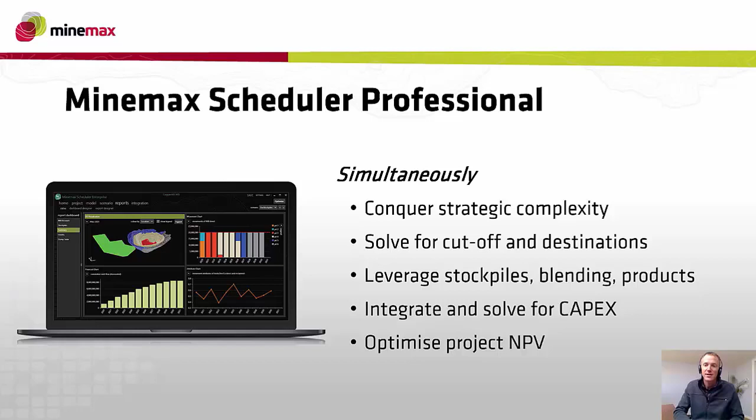In this presentation, I'm going to be referring to a range of techniques that employ our flagship product, that's Minemax Scheduler Professional. Scheduler is a premium software. It can be used to leverage multiple aspects of an operation simultaneously, and it delivers maximum NPV. And it does this in a way that provides the mine planner tremendous flexibility, and even more importantly, a strong set of controls. And that is because we believe in balancing the power of optimization, the power of that mathematical objective, with the expertise of that individual mine planner in their own context to steer that schedule in the right direction.

Mine planners are doing amazing things with Minemax Scheduler all around the globe. You've heard about some of this already today. You might hear about more of it later this afternoon. I've had the honor to work with a number of our clients personally, many of them here in the Americas. And while each situation is unique in terms of requirements, most mine planners that we talk to are considering core elements or core processes in their strategic mine planning, and they consider that as part of standard practice. So just to elaborate on that a bit further, we're talking about these types of things.

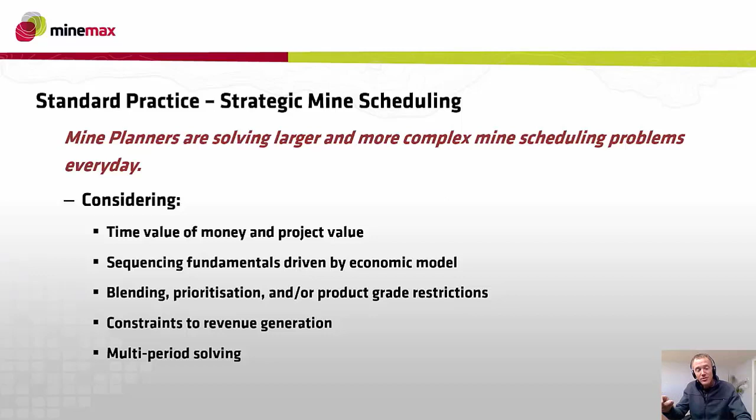Scheduling, considering the time value of money, the importance of a discount rate in the context of a schedule. The derivation or the determination of the mining sequence, considering an economic model: that's activity-based costing, maybe fixed costing, revenue models, these things. The management of blending, product spec, and destination at the same time the mining schedule is produced. Honoring multiple parallel constraints aligned to production capacities or other practical controls. And solving schedules considering future implication. What I mean by that is multi-period solving, considering everything that the decisions I make in this period may impact in the future.

So I'm going to build upon this foundation by talking about some complexities on which that foundation can be used as a platform. Some of those complexities are these: how to incorporate the option for backfilling exhausted pits with waste material in the schedule, how to consider constraints not only on the destinations for blocks, but also on the routes that we use for haulage to access them. How do we include the scheduling of waste for tailings dam modeling requirements, to build the dams with mine waste material? How to properly assess capital options in the framework of a mining schedule, and how to incorporate financial objectives into the scheduling process.

And I've pulled these 5 out because we're talking to a lot of people all the time, and these 5 seem to come up fairly often. They're widely applicable, and each of these particular situations presents a unique opportunity to influence the mining schedule. And so in integrated optimization, these are great problems.

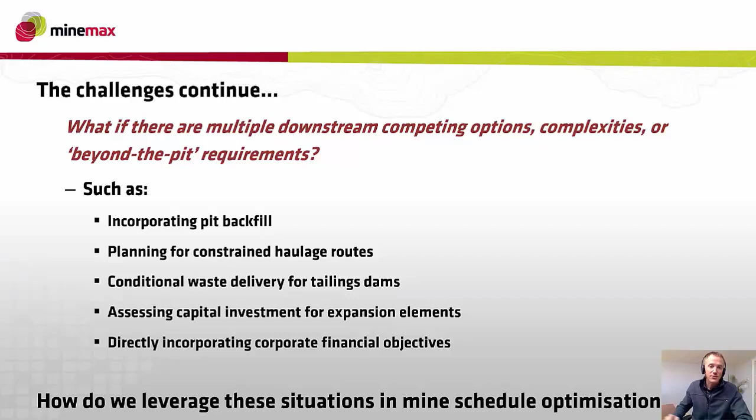Let's start out with the pit backfill. So in the pit backfill, I'm referring to a multi-pit or multi-phase environment, which has been designed to allow for the potential of mine waste material from one pit phase to be placed into the void of another once it's been exhausted, right? This is a sequencing-dependent interaction.

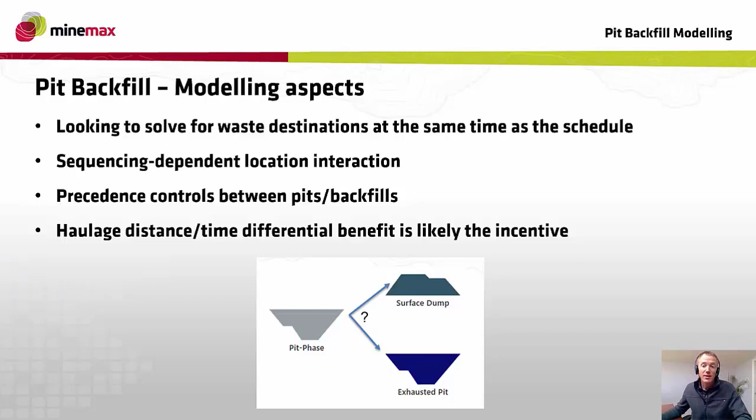So in other words, we don't know when a given pit phase is going to be mined out until we schedule. We have a significant opportunity to improve the overall plan by solving the destination for waste at the same time we solve the mining sequence, because it may change that mining sequence as a function of these new dumping alternatives. The haulage differential is going to be one of the greater incentives here for pit backfill, right, from a cost perspective. And so reducing truck hour burden and giving the visibility of that option to the optimizer to be considered during scheduling is a big piece of how we solve this.

As you all know, the accuracy of the information we use to populate that optimization model is going to determine the accuracy of your result every time. Right? In terms of the haulage model, we have to decompose the route network to inform the solver of all options for cycle time burden. Likewise, in that same optimization model, we have to define the precedence relationships between mining locations and a dump location that is effectively the mined void of that pit, so that we can control the release of that dumping capacity. The dumping volume is linked to the mining volume through a capacity balance.

Then we solve the problem. And optimization is going to consider the benefit of opening up dumping space through sequencing changes, balancing known surface waste dumps with possible backfill locations, considering the impact on haulage at an accurate level, and it will arrive at the best sequence in terms of NPV.

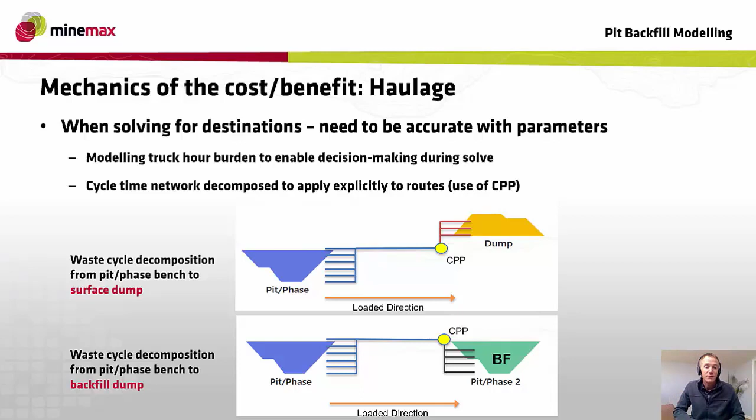Moving on, the next one that I want to talk about is planning for constrained haulage routes. So when we're generating a mining schedule that seeks maximum value, you're going to see schedules pursuing a reduced waste haulage cost whenever possible, right? The last example is an ideal one for that. And this is correct. However, we also need to understand how the cost is being reduced. Automated scheduling tools are going to place material on the shortest routes possible, right? Because we're going to try to lower that cost.

However, in some cases, we have to also be aware that we may exceed the material carry capacity on those routes in any given period as a function of traffic or other limitation, right? The mining location may be able to produce it, the destination may be able to accept it, but the route that connects those two, can that carry it? That's a different problem, right?

So if we were to think about doing a schedule without considering that route constraint when we know it exists, we have a problem, right? Because we have to go in and change the trucking allocations after the schedule has been produced. This is a manual process. It's really painstaking and it's error prone, and it's always going to leave some value on the table because your haulage plan and the sequence that you have set are effectively arrived at in isolation. So this is the problem.

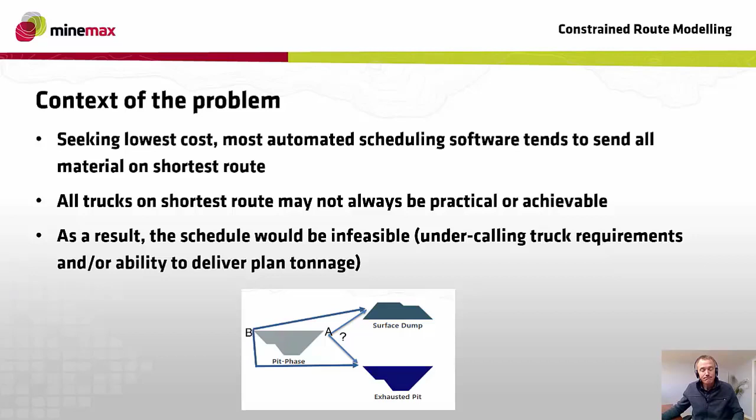One of the ways that we can approach that a little differently to avoid this problem is, within the mine schedule itself, to model haulage routes as process-based decisions. So what that means is for waste, the decision becomes not only what waste dump do I place the material on, but what route do I take to get it there, right? It's a combination. A constraint can then be placed on each route that represents the total available carry capacity on that route. That could be in tons per day, grossed up to be the amount of total tons that can travel on that particular process route in a given period. And you can vary those period to period.

And that route constraint on individual routes, in parallel with the total available fleet constraint expressed in total truck hours, will control the feasible solution space. So those two will operate in parallel.

As a result, you're going to see that your shortest route options are going to be filled up to the constraint limit. Remaining material will be scheduled against alternative, less desirable routes, provided it's profitable to do so. And your NPV may be lower as a function of this, but your plan is achievable and your schedule makes sense.

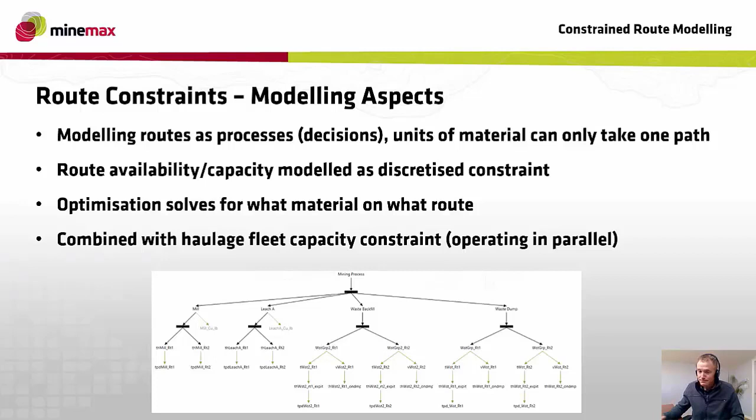All right, another one on waste. This one is delivering waste out to build tailings dams. So, contrary to some popular opinions, the tailings aspect does have implications for the mining schedule. So it's not these two silos after all, right? Generally, certain types of waste are required. Geologically, the material spec that's required for building a tailings dam may not be available throughout the pit all the time and not readily available in the mining phases.

So we cannot have on-demand delivery and still achieve all of the production things that we want to do. And so to keep costs down, we also want to try to reduce the amount of stockpiling and rehandling as much as possible to fulfill that obligation and our others. We must also ensure that the revenue production, which is tied to the mill, and therefore the production of tailings, which is creating this requirement, is not impacted by any delay on the construction of the new tailings dams. This is all interrelated, as you can see.

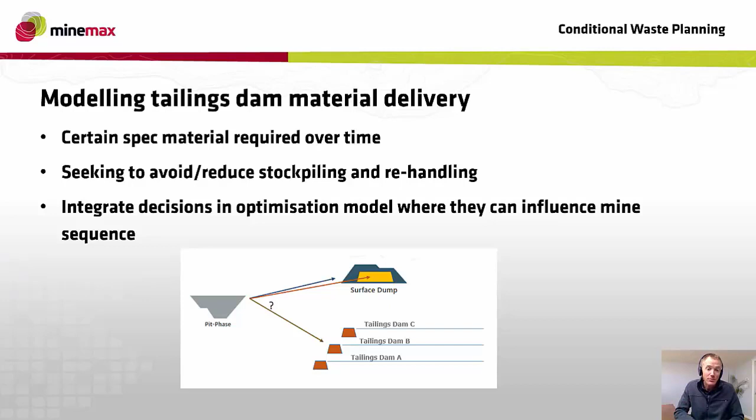So by solving this material delivery for tailings dam construction at the same time the mining sequence is generated, we could take advantage of some opportunities. We can establish the link between the requirements, the source, and the delivery, and we can reduce the amount of stockpiling as much as possible. So we would model this as an integrated problem. The mill is going to produce tailings at a variable rate depending on what it is fed, and that will influence the tailings dam requirements. So we're already back into this mining sequence problem.

The volume that's required to build the dam and the connection from that to the tailings capacity it's going to provide when it's done being constructed is directly linked. It's directly linked also through process and precedence relationships, either on the location side or on the material decision side. Then we populate cycle time burdens for the various routes, giving the solver the differential information it needs to make decisions, similar to how we decompose the routes in the backfill example or the route example.

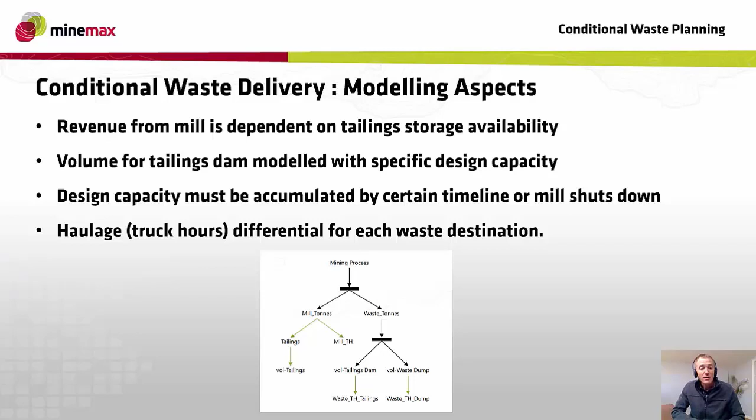So in this way, the mining schedule can be determined with full knowledge of those interrelated elements, taking advantage of sequencing and destination decisions as it encounters material in the pit, with possible mining sequence changes in order to meet these objectives, keeping the mill full if it's profitable to do so, and of course, keeping those tailings dams built on schedule.

All right, the next one is Capex optimization. In order to talk about Capex optimization, I find it's always important to start by discussing constraints, because in the way we approach Capex optimization, this is the backbone on which it operates. So in any operation, there are some hard constraints. Generally, these are binding in most, if not all, periods, and those bigger ones are tied to heavy infrastructure or capital. There are also other constraints operating: equipment capacity, permitting, land access, location availability. So we're dealing with a multiple parallel constraint problem.

But individually speaking, Capex optimization is a way to determine whether to invest capital in order to release a certain infrastructure constraint up to a given magnitude. It solves for if, when, and how many instances of a given capital option should be exercised with the aim of increasing project net present value. So when combined with the remainder of the other scheduling decisions and the foundation that we've discussed, and possibly some of these other more complex situations, this type of optimization of the capital element can more adequately inform business strategy.

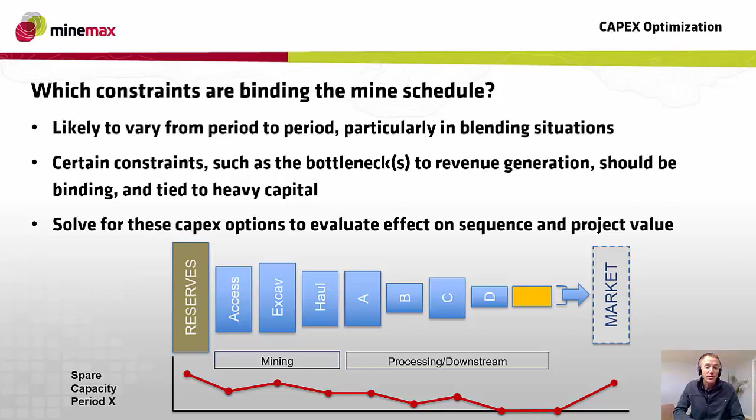So let's take an example. A common one in the mining environment is a truck purchase. To model this, I'm just going to break it down for you; it's not going to get that technical. We're going to have truck hour burdens, so cycle times for all possible destination combinations, modeled as processes, and possibly route options as well. We need to know the network and the possible burdens for truck hours, depending on where material could go.

Then we need to define the total fleet constraint in terms of truck hours per period. So this is your existing truck capacity based on the trucks you have on site, not the ones that you want to buy, right? For the ones that you want to buy or you want to give the option of buying, we develop Capex definitions.

And each of these is created in a scenario, and it represents the detail on that asset investment, right? The obvious stuff, the purchase price for the new truck, and the amount of truck hours that asset will provide to the operation, and an assumed use of availability. We can go a little further and get more detailed and model the truck lifespan as well.

We can model that with expansion and decay, and it's all on the basis of that capacity, that truck hour capacity. So from a commissioning perspective, there may be a lag between the point that I invest my capital until when my truck is ready and commissioned to hit the first shift, right? And we can represent that on a period basis with a lag or an expansion as it gets going.

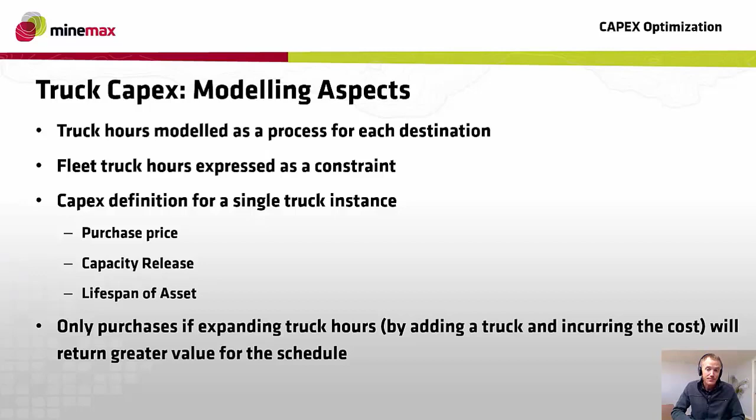And lastly, corporate financial objectives. You know, these vary for each company mining situation. Common examples could be maintaining a minimum cash reserve, maybe repaying a debt by a certain date, maybe limiting capital spending, maybe ensuring a return. Each of these are very different than a straight maximum NPV objective. You won't arrive at those naturally just by seeking maximum NPV for probably all the reasons that you know.

All right? In Scheduler, in order to deliver on these kind of objectives, we treat these things as financial constraints. They can be expressed as minimums, as maximums, as cumulatives, right? And there could be multiple parallel financial constraints. A couple of examples, right? For instance, to maintain a minimum cash flow in a mining schedule, the planner can impose a minimum profit constraint. It can vary over time.

This will alter the schedule when you go to solve, as it will change the capital or the waste stripping strategy, for instance, in order to return a feasible schedule, especially those who have major stripping hurdles. Or the planner may have a range of possible equipment purchase options. Maybe it's a greenfield environment and they've got a limited amount of capital that they can deploy.